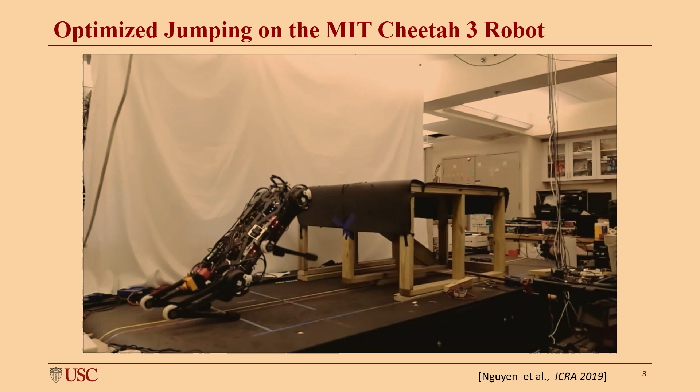To start my talk, please allow me to go back in time and share a highlight of my work here at MIT. When I was a postdoc with Sang-Bae Kim, I had a chance to work with this mighty MIT Cheetah 3 robot. Even with a lot of development and commercialization for legged robots since then, I think this is still the most powerful quadruped robot that ever existed. However, when I joined the lab, the robot was able to walk quite well, but not able to jump yet. So the task that Sang-Bae gave me was, okay, you need to let it jump. It's quite a pity if we cannot let this powerful robot jump. And here we go. This is actually the video that's captured from Sang-Bae's phone using slow motion. Okay, so that's a good memory. Earlier this day, I had a chance to visit and meet with the MIT Cheetah robot again.

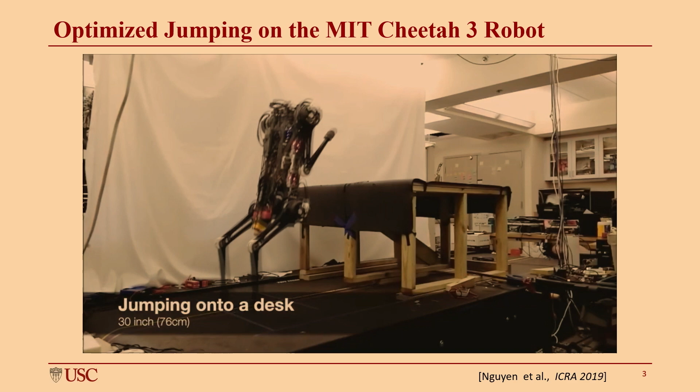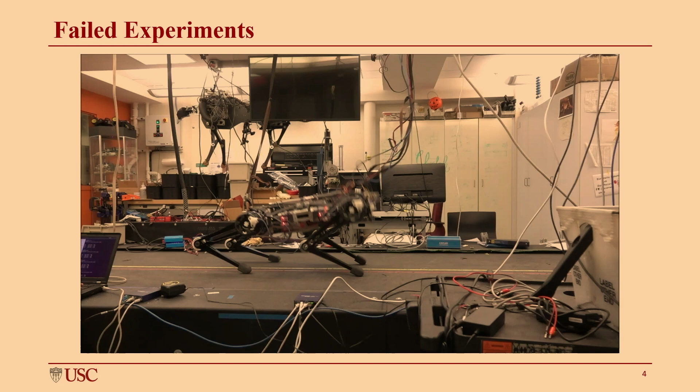There's one more video related to this that I really would like to show here to the audience. This is a compilation of some failed experiments that I got along the way before getting the successful experiment that I showed you earlier. I have many more videos, but I just want to show a couple of them. The message that I want to show here is that I know some of you in the audience could be PhD students or postdocs. So if you happen to get stuck with your experiment, don't worry, this happens all the time. That's how we do reinforcement learning for research, right? We keep trying. If it fails, let's learn and improve over time.

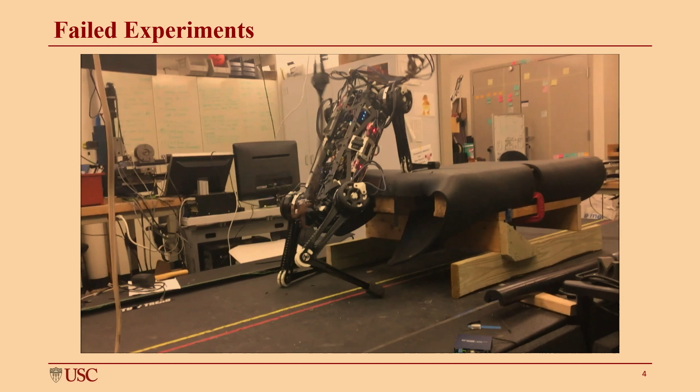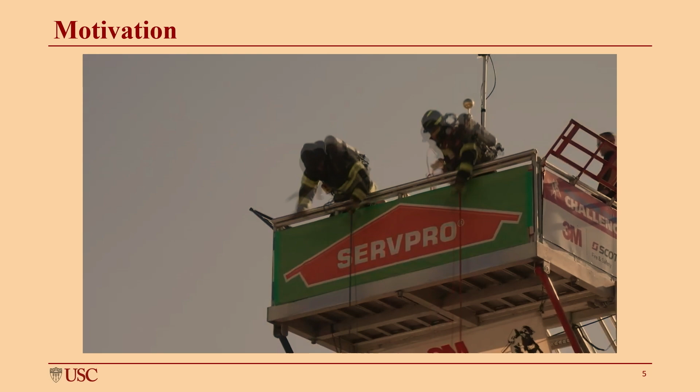So come back to my talk, talking about the motivation for my research. Let me first play this video. I feel pretty lucky to find this video because as you see later on, this represents very well different projects that I will be presenting today. In this case, as you see in emergency response, our first responders just barely walk, right? They just run, use their hands, use their entire body to climb faster and at the same time carry very heavy loads or equipment. So they need to deal with lots of heavy lifting tasks, and they need to do it very quickly, as fast as they can, because of the urgency.

So for this, I want to highlight here this about dynamic loco-manipulation whole body manipulation, because they do a lot of loco-manipulation tasks, but you need to leverage the whole body to perform this task very effectively. And the second part here is that they need to adapt to different load carrying problems, and they also need to adapt their performance for challenging terrain. These are actually three main capabilities of legged robots that our lab has been trying to achieve in the last several years.

I hope the video I showed earlier can provide some good reasons why legged robots can be helpful. In my opinion, legged robots can soon help replace humans in many meaningful applications. But I believe the key features we need to achieve this are agility and adaptation. Without agility and adaptation, we would not be able to have legged robots in practical applications.

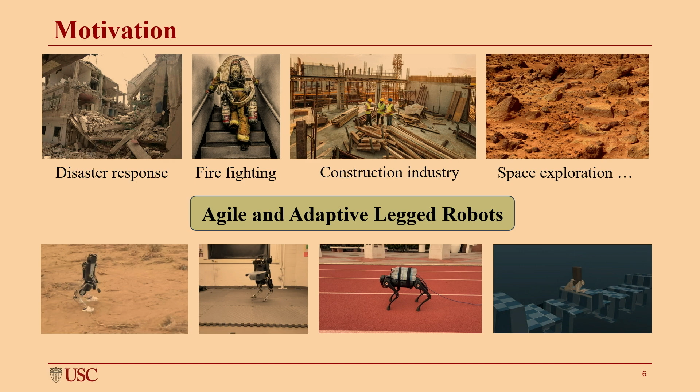To tackle this challenge, we have been working on different problems and solutions to improve agility and adaptability for legged robots. Today I'd like to highlight three main research topics in our lab that I will present, and show some quick videos to give you a big picture of our work.

Firstly, I will talk about our work on MPC for dynamic locomotion and loco-manipulation for both quadruped robots and humanoid robots.

Secondly, I will present our work on adaptive control for legged robots that allows legged robots to run while carrying unknown heavy loads or interacting with unknown objects. This is a video for one of our projects on the second topic.

Lastly, one interesting question we are trying to address in our research is how to leverage reinforcement learning to realize long-term agility and adaptation.

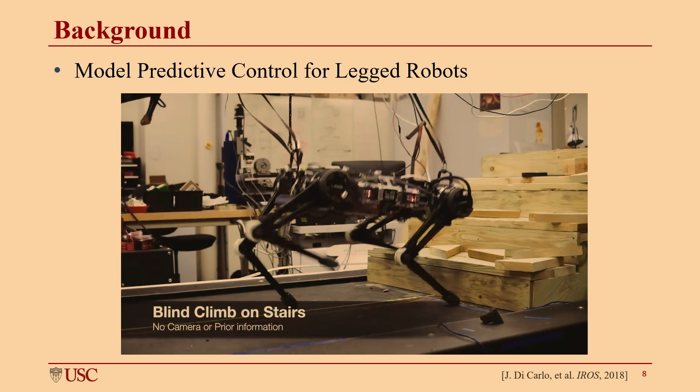Before explaining our research in more detail, let me give a quick overview of model predictive control for legged robots. This is basically the baseline approach for many other works I will be presenting today.

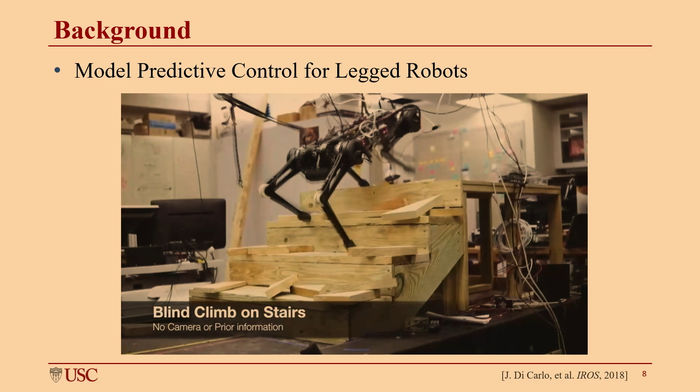As you see in this video, the MIT Cheetah 3 robot with an MPC controller can blindly climb up a stair with one single controller. It is very robust to this uneven terrain.

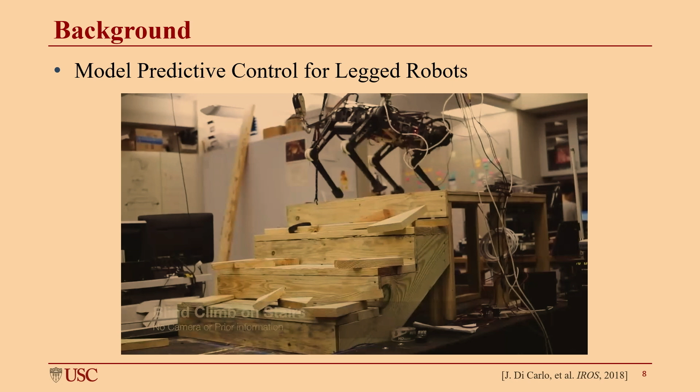In this video, it's totally blind - there's no camera, no prior information about the stair, but the controller can handle it pretty well. This is a very nice framework - it's very robust to uneven terrain. You can simply use one single MPC controller to achieve a wide variety of different locomotion gaits and velocity commands.

However, it also has several limitations. So what is the limitation? To better explain it, let me talk a little bit about the control diagram for MPC here.

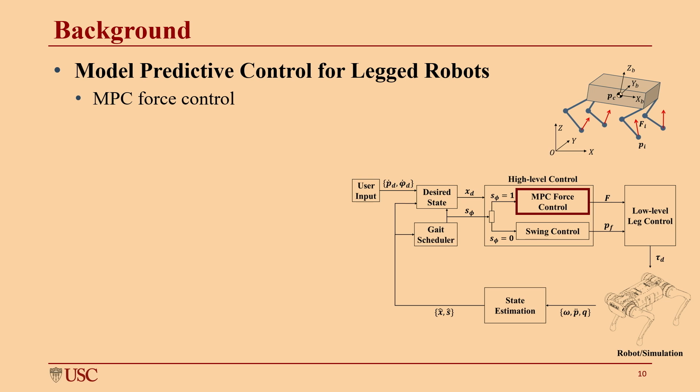There are two main components for MPC for legged robots. The first one is force control - when we have the legs on the ground, we do force control, regulating the force command to the ground. The second component in this control diagram is swing control.

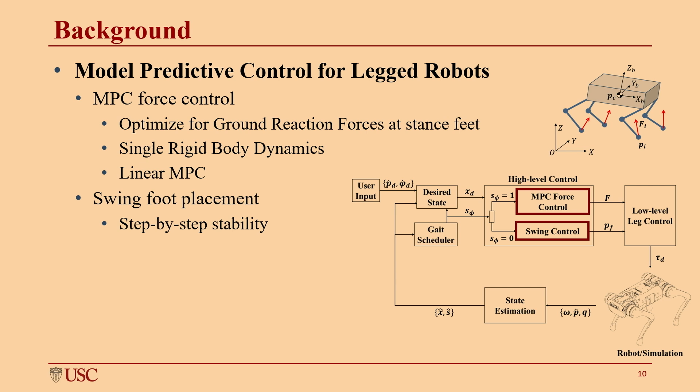For force control, we optimize ground reaction force at stance feet, but we use a single rigid body dynamics model because it allows you to have a linear MPC model so it can be solved effectively in real time. For swing foot placement, it's important because it helps you do step-by-step stability - basically when you take a step, it also helps balance the body.

So what's the problem here? Firstly, as you can see, MPC for quadruped robots is initially designed for quadruped locomotion only. In my talk today, I will discuss how we can expand MPC for loco-manipulation.

The second disadvantage is that because we need to use a simplified model to guarantee it can be solved in real time, it has some problems with model uncertainty. In the second topic, I will talk about how we can use adaptive control to address this problem.

As you saw in the control diagram I showed earlier, there are two components - stance and swing - but these are two controllers that are kind of decoupled from each other. Later on, I will present another framework using reinforcement learning so that we can better synchronize between these two components, or have a more unified framework to modify them at the same time.

Firstly, let me talk about our work on adapting MPC to realize dynamic loco-manipulation on legged robots. From this figure, I would like to show an overarching idea of our vision or application for loco-manipulation in this domain.

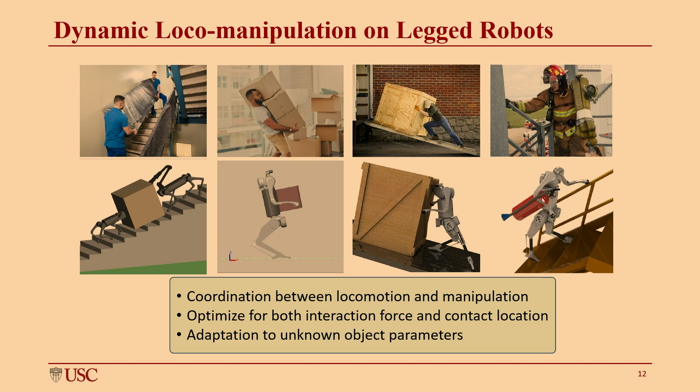In this application and these different figures, there are three main challenges that we focus on addressing. The first is how to coordinate smoothly between locomotion and manipulation so the robot can perform loco-manipulation effectively. The second is how to optimize not only the interaction force but also the contact location, since during interaction with objects, the contact location for the manipulation task is also very important. The last challenge is critical because in many applications we don't know the object's parameters in advance, since we interact with the object for the first time. So it's important to be able to adapt to a wide variety of unknown object parameters.

For the first project in the direction of loco-manipulation, I want to present this work. The motivation is that you may have seen work on in-hand manipulation, but if you have a very large object, it might not be possible to use a hand to manipulate it. So in this work, we use the entire robot body to manipulate this large and bulky object.

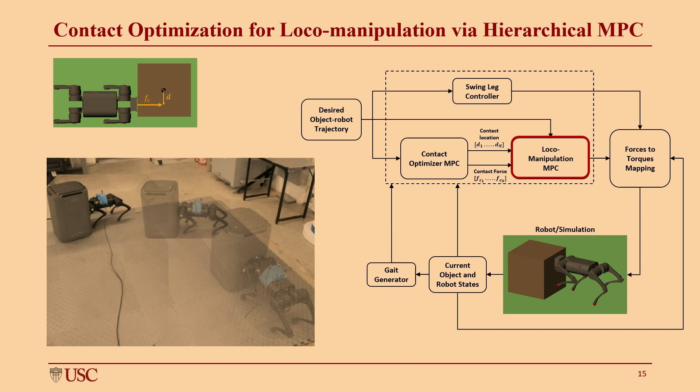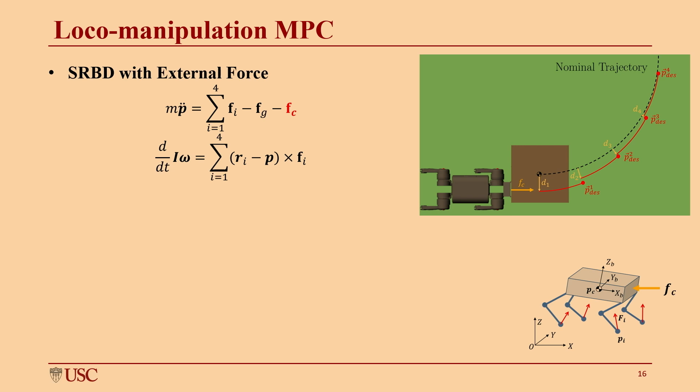The second layer of MPC, which we call the loco-manipulation MPC, regulates the desired contact force and contact location from the first layer. The principle here is that if the robot pushes the object with a contact force FC, there's also a reaction force applied to the robot. Using this knowledge, we design the MPC controller to regulate this contact force FC, and also use the distance or contact location to define the desired motion of the robot.

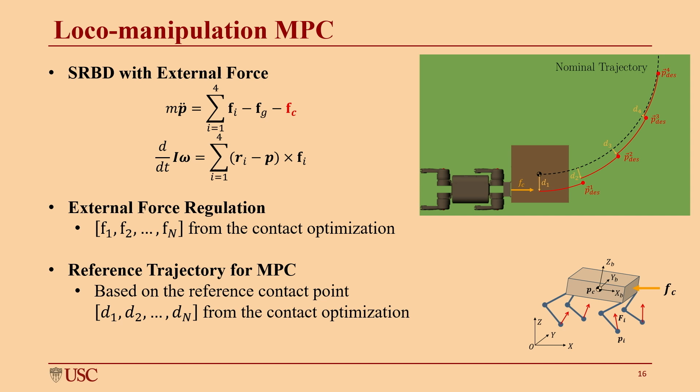As mentioned earlier, we don't only use one contact force and location variable, but leverage a sequence of them. Basically, we care about what we want to command in the future horizon, and it's important to put this into the MPC controller.

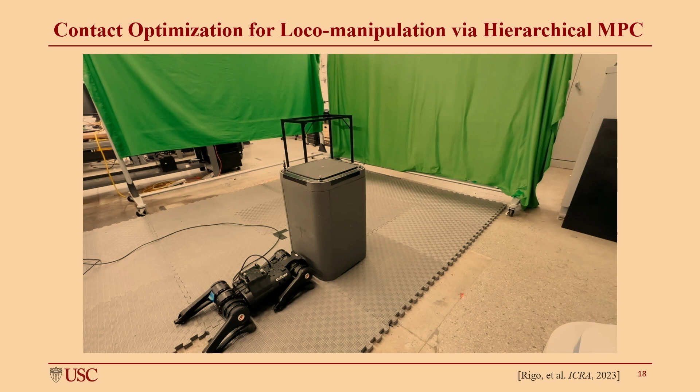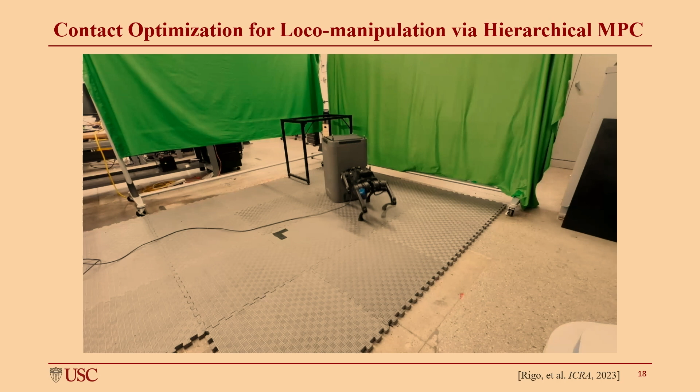Another interesting experiment I want to show here is one where the robot needs to push the box, but at the same time it also needs to avoid an obstacle. This requires accuracy in manipulating around the obstacle.

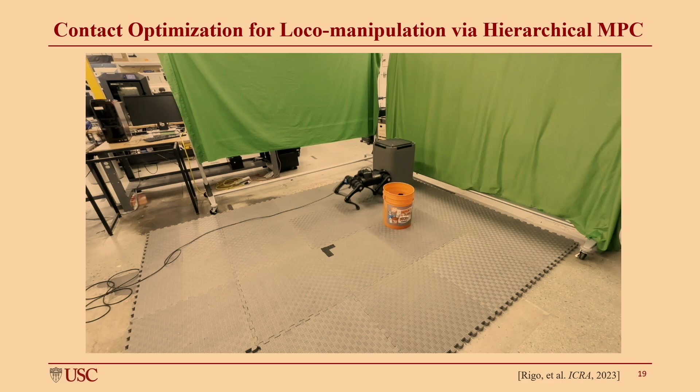So for the next part, let me continue with loco-manipulation, but now let me talk about loco-manipulation for the humanoid robot. For the first part, we expand the MPC framework for our bipedal robot. The concept is very straightforward and similar to what we had earlier for MPC for the quadruped robot. The only key difference is that we have a different model for humanoid: instead of having contact force only, we also have a moment that can be regulated at the contact point.

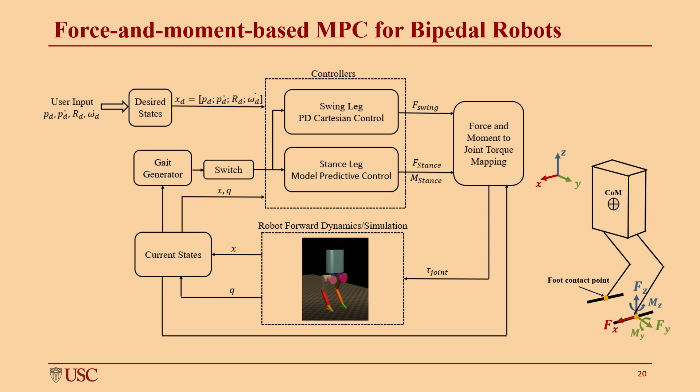With this simple modification, it worked quite effectively. Using this method, we were able to realize very robust and agile locomotion on our humanoid robot Hector.

We also tested this with different scenarios: we have locomotion, we have turning, we even have turning on uneven terrain. And we have our simulation open source here, so if you want to give it a try, please go to the link and try it.

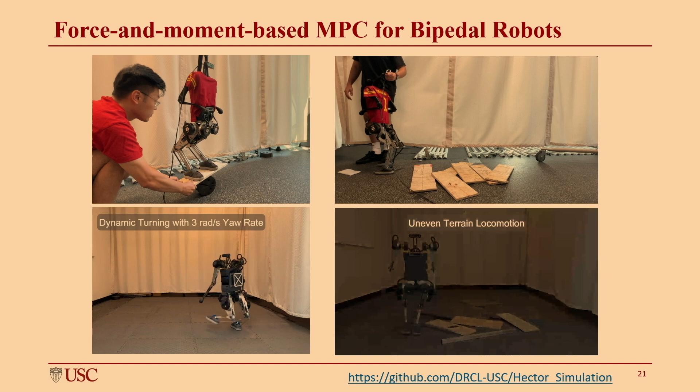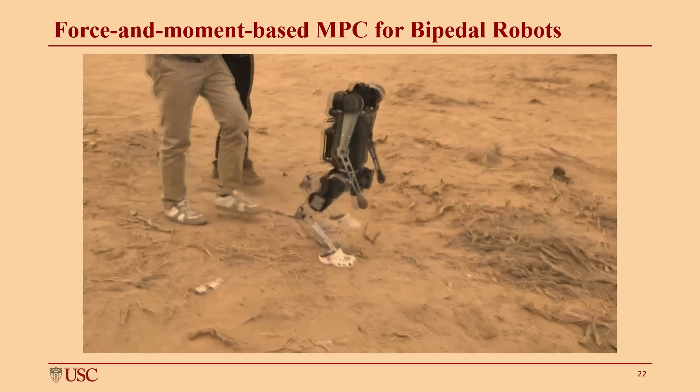And recently we also brought Hector to Mars. Okay, just kidding. So we brought Hector to a NASA event in the Mojave Desert in California, where the terrain is considered very close to Mars. We had a lot of fun.

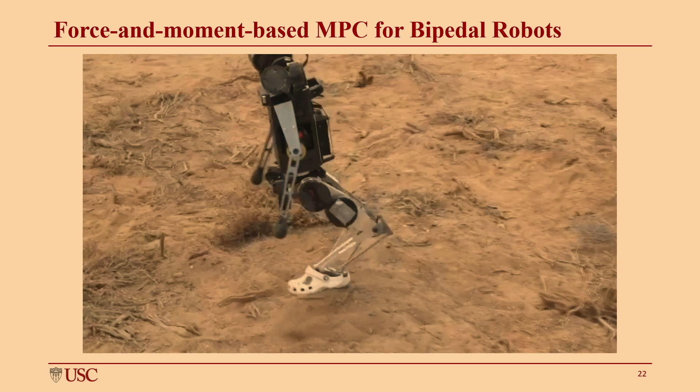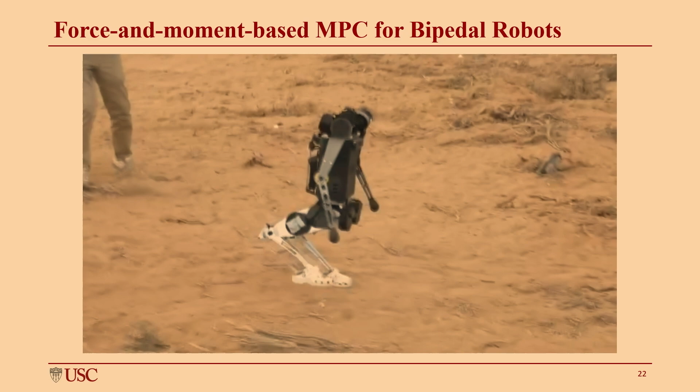But the weather that day was quite extreme. There were a lot of winds, and it was very hard to run the robot during this day. But we had a lot of fun. We ran the robot almost 6 hours continuously without

any problem, though the robot fails sometimes. Later on, you will see some failed experiments at the end. But because of the size of the robot, the failure is quite minor, and we just bring the robot back up, reset, and run it again.

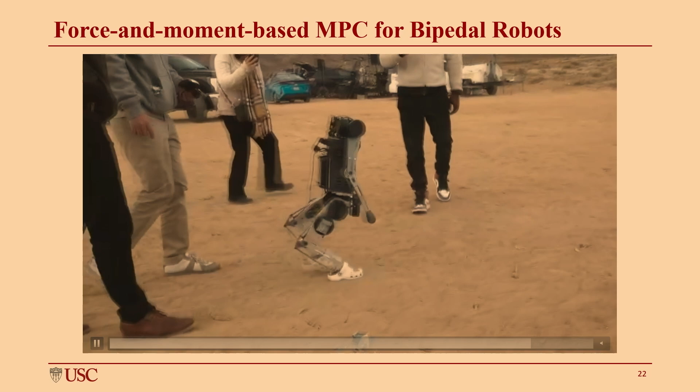I'm not sure if you can hear it, but the wind is very strong.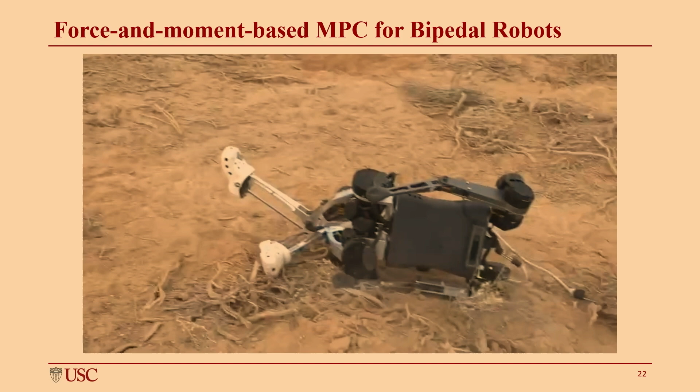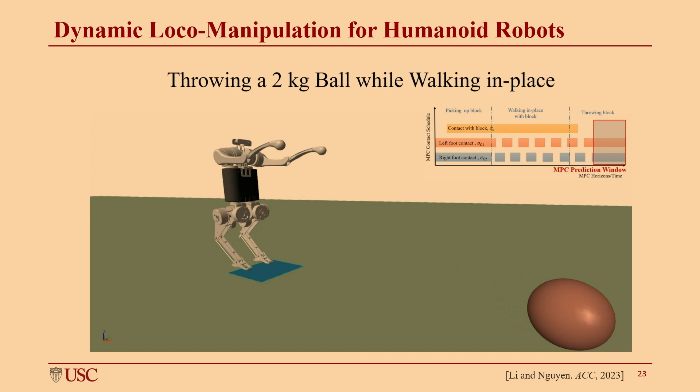As you see in this video, the robot picks up a 2-kilogram object and tries to throw it. As you can imagine, if you don't consider the object dynamics, and simply throw the object forward quickly, it will push back the robot and it will fail. So what's the principle that we have here?

The main principle has two parts. The first is we need to consider the object dynamics inside the MPC model. The second, also very important, is that we need to consider the contact sequence in the loco-manipulation task. So in this multi-contact sequence model predictive control, we have contact for the foot, but we also have a contact sequence of the arm with the object.

Talking about the model, there's one interesting finding here. Let me do a quick comparison. Let's say you're holding an object and you want to design a controller to manipulate it. There are three different options you may have in mind.

The first option is that you ignore the object, and consider that the robot stays the same. Obviously it will fail, because you don't consider the object in the dynamics.

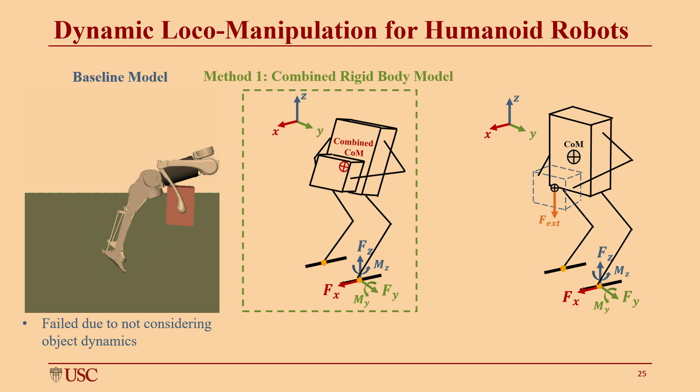The second method seems very straightforward: as long as you have an object, you just attach the object to the body and combine them. That seems like the most straightforward way to do it. But when we tried it, it failed.

Why did that happen? Because you don't keep the object all the time. Sometimes you have the object on the table, you want to pick it up, then put it at another location. This means you expect a change in the object mass or structure in the controller formulation.

But what happens when you combine them? At the time you combine, you significantly change the formulation of everything in the MPC, because you change the mass and the center of mass location — that's a significant change in the MPC formulation. Eventually, the optimization problem will not be able to give you a good solution.

The third option is basically the common ground between them: you represent the object as an external force. This means that when you have the object, you only have a single parameter that appears in the MPC formulation. So if you pick up the object and release it, there's only minor change in the MPC formulation, and it works very well.

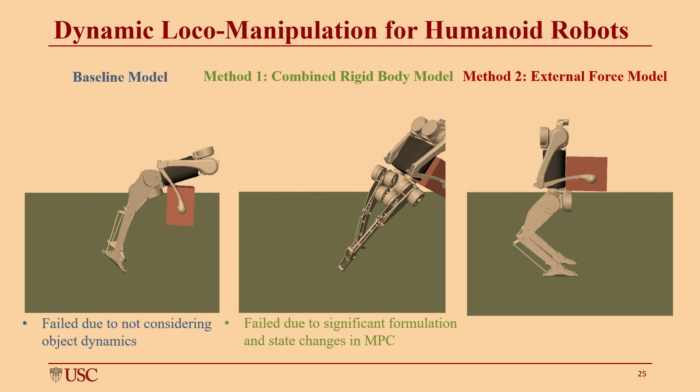So the conclusion is that we have this final choice to represent the object as an external force. Obviously this option will be less accurate and straightforward, but it works better when we combine everything together. This also highlights the meaning of hierarchical structure. When you have a hierarchical structure to perform different tasks, sometimes you need to sacrifice accuracy because when you put everything together, it needs to synchronize with each other well.

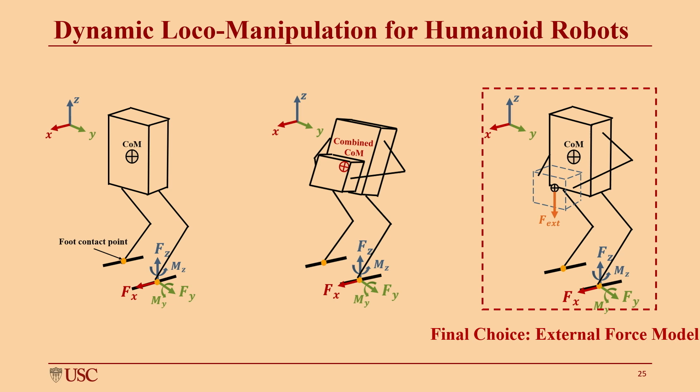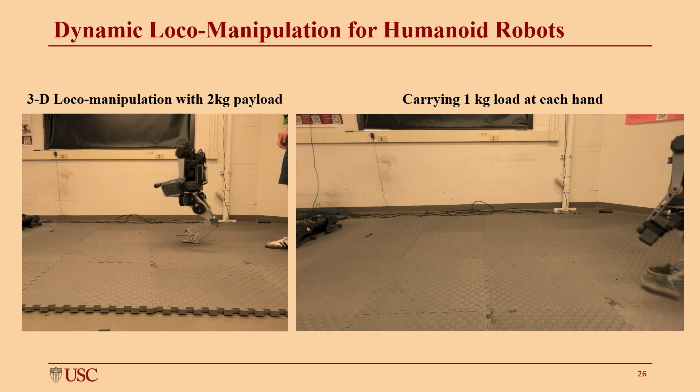Using our method, our robot can perform this dynamic loco-manipulation quite well. I think our students had a creative idea to use a battery instead of the load. We ran out of the load in the lab, so we put it there instead.

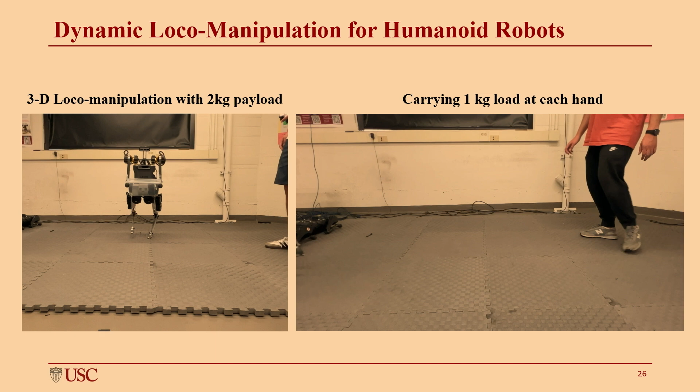Before I move on, any questions on this topic? Go ahead. So when you represent the payload as an external force, can you talk more specifically about the difference compared to it not representing some inertia term?

Yeah, that's a good question. As I mentioned, obviously the second option will be more accurate, because you mentioned moment of inertia, something like that. But I think one extension is that you can also have another term, like moment of inertia, to represent things if you try to do something more in 3D space. But if you just try to combine the objects, it changes — as you see in the MPC formulation, when you change the center of mass location, it changes every equation inside it.

So for the second part of my talk today, I will discuss another line of work on adaptive control for legged robots.

Until now, I have been talking about different projects involving loco-manipulation when we handle objects. But some of you may think, okay, the assumption that we should know about the object's mass, moment of inertia, friction, right? Because normally we don't have it — you have an object in front of you and you try to manipulate it. So what does that mean? It means that in practice, you want an adaptive controller framework so that you can handle this wide variety of different objects and assumptions.

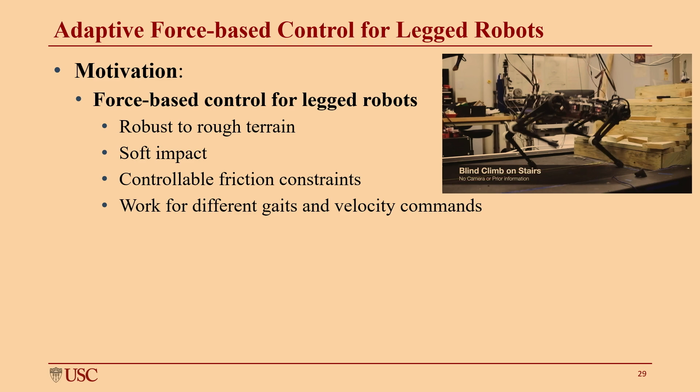So before presenting the adaptive control work that we have, let me talk about the motivation. As you see, we have force-based control, we have MPC for legged robotics, and it works very well. But the current adaptive control framework from the control theory side is normally for trajectory tracking. What does that mean? It means that for robotics, you need a different trajectory for different motions. In this framework, we want to leverage adaptive control, but for force control, so that we can have the advantages of force control that we discussed earlier.

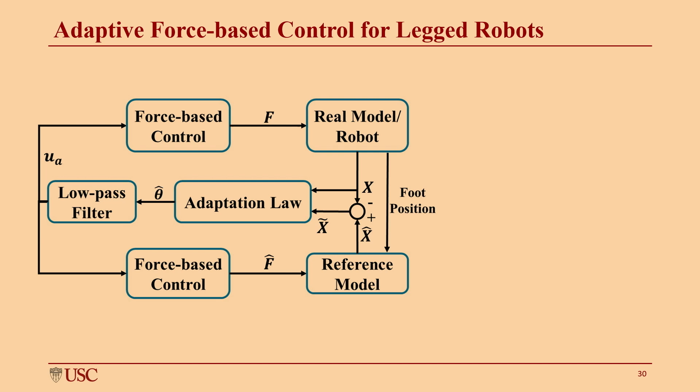For the interest of time, I won't go into too much detail, but let me explain the main principle of the method. Our adaptive control framework is based on the structure of model reference adaptive control, and here we compare the performance of our controller from the real robot and the reference model.

So the real robot here has, let's say, the robot carrying an unknown load — this load is unknown to the controller. And in the reference model, it's more like a simulation of the robot without carrying any load. The root of the adaptive controller is that it compares the difference between the state it gets from the real robot and the reference model, so that it can design an adaptation law to compensate for it.

But one important thing we need to modify and adjust so we can apply this force-based control for adaptive control is that we need to synchronize the foot position from the real robot to the reference model. Because in the reference model and the controller for the robot, we don't have swing control here, but as you saw earlier, we have swing control for both. However, if you also implement swing control in the reference model, there will be a significant difference between the two — but the goal here is that we want to adapt for the force-based control only.

So what does that mean? It means you need to modify the reference model using the foot position that you get from the real data. That's the main principle that allows us to do adaptive control using force-based control.

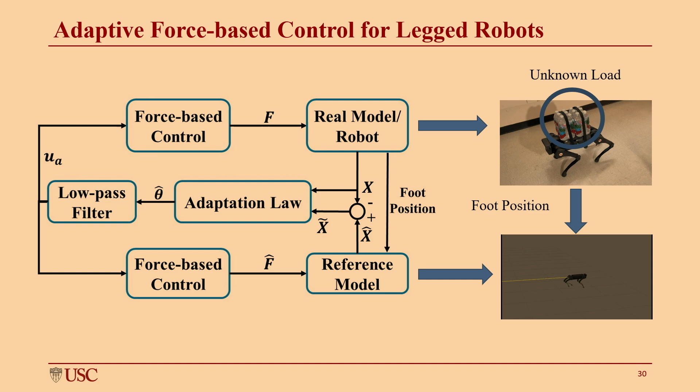Another challenge when we apply adaptive control, especially for MPC, is that MPC is very computationally expensive. If you need to run two different MPC controllers plus an adaptation law, that's a lot of complicated computation happening on board. So what does that mean? It means that in order to make it happen, you need to have this kind of adaptive frequency framework to make sure everything can run in real time.

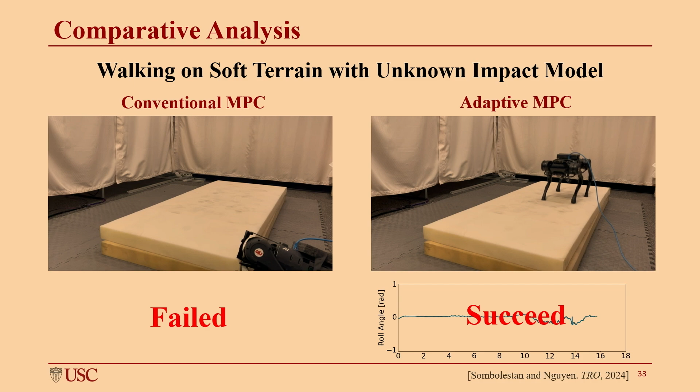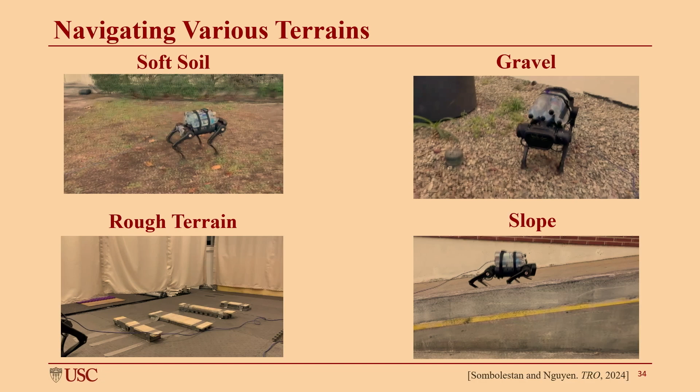We also validate our controller in a wide variety of different scenarios and terrains. This one is on a slope, carrying also 5 kilograms of load.

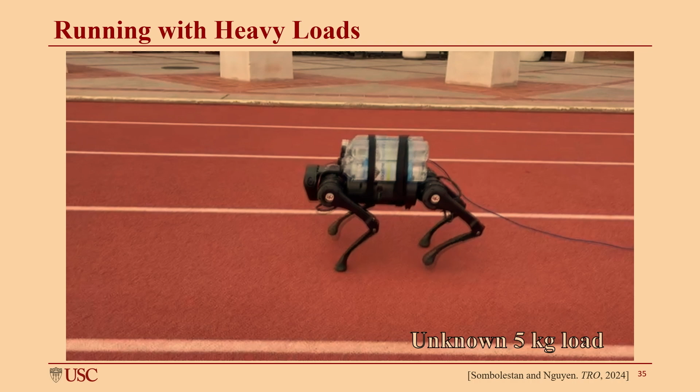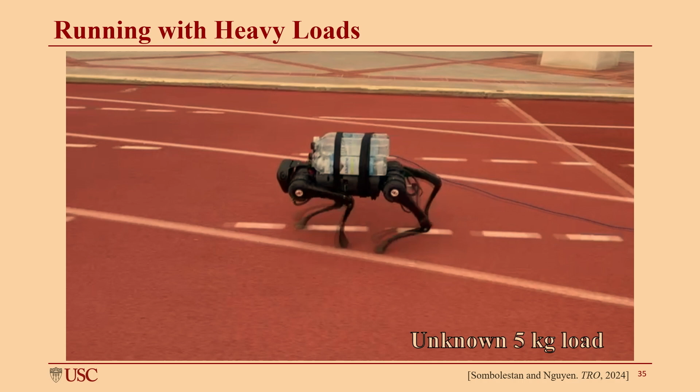One more video that I really like is that we are able to achieve fast running while carrying 5 kilograms of load. As you can see, when the robot speeds up, the water here is shaking a lot, but as you see from the video, the robot can keep its body stable very well.

To continue, I'll talk about how we extend our adaptive control framework for loco-manipulation and collaborative loco-manipulation. This comes back to the earlier example: if we have a large and bulky object, you would not be able to do in-hand manipulation, so one option is to use the body to push the object. Another application is if the object is very large, you normally need multiple humans or multiple robots to work together on this.

In this example, we assume we have a very large object. What assumptions don't we know? We don't know the mass, we don't know the moment of inertia, we don't even know the center of mass location of the object, but these parameters are normally very important for designing the controller or performing the task.

Layer 1 is used to design an adaptive controller for the entire system. You consider the object you want to manipulate, with different control inputs applied to it. In this first layer, you don't worry about where the robot is - you design a framework so you can manipulate this object using different control inputs applied to it.

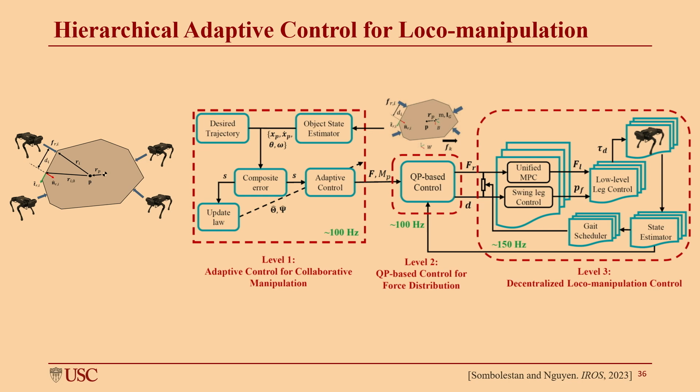Using this method, as you see, if you don't have loco-manipulation MPC, the robot gets stuck because we don't have the object in the dynamics. Here we have our adaptive control framework activated, and it can push the object with the desired velocity.

Here's another experiment I want to show. In this experiment, there are some interesting unknown factors. We have the slope, which is also unknown to the controller. We have the object, we have friction. These parameters are totally unknown to the controller. You see the robot just stepping normally, and the student puts it in front, and it almost immediately adapts to push this off.

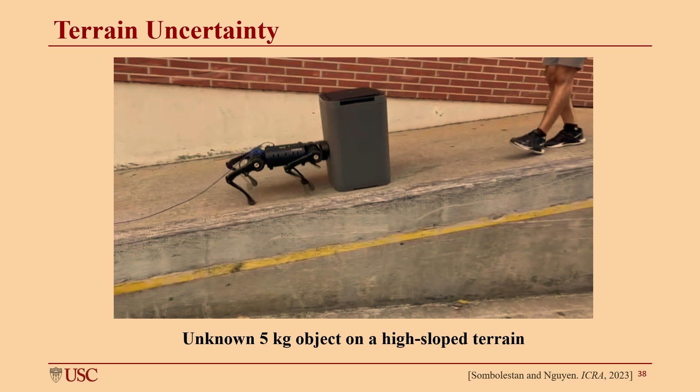Here's another work we did with collaborative loco-manipulation. We expanded it so now we have two different robots, one A1 and one AlienGo, working on the same problem. Because our method is very generalizable, we can treat different robots as different kinds of actuators to apply to this system.

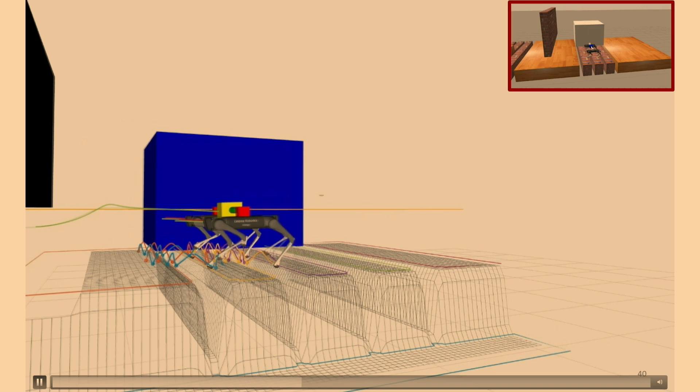As you see here, along the way, the robot will do footstep planning. There's a gap here, so you try to adjust a step. But if you have one single robot planning only, and you don't coordinate with each other, it's very easy to fail in this case. So that's a very challenging problem.

If you're carrying a sofa with your friend, for example, stepping upstairs is a very challenging problem. You need to be careful, you need to plan for it. Here, the robot also needs to adjust the height so that it lifts over the obstacle to avoid it.

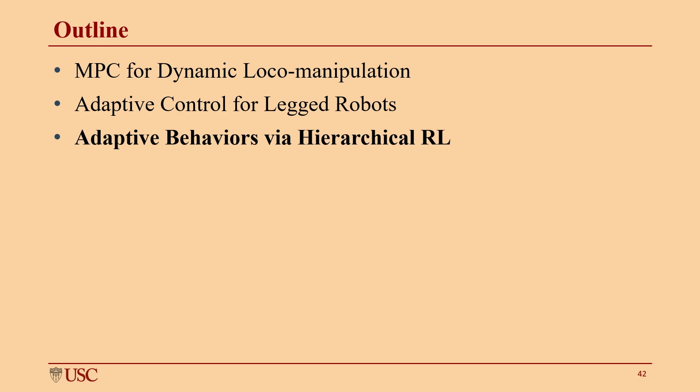Firstly, I would like to talk about our work on RL-augmented MPC so that we can better synchronize stance and swing control in the MPC framework. As I mentioned earlier, in our MPC framework there are two different controllers, one for stance and one for swing, but they're decoupled from each other. Here we want to leverage our reinforcement learning framework so that we can synchronize force control and swing control, to improve agility and adaptive behavior for legged robots.

The principle we have here, I'll explain it further, is a term called dynamic compensation to do adaptive control. Earlier when I talked about adaptive control, we have a load carrying problem. When we do that, it will reflect in some change in the dynamics equation, and this policy will try to learn this acceleration term. So this is the acceleration term, or force command. Later I will explain the reason behind this equation.

Using this framework, we achieve quite significant improvement in terms of agility and adaptability for legged robots. To be more specific, we can increase the turning speed up to 58%. We can do load carrying up to 80% of the robot weight while navigating compliant and unstructured terrain. In the last experiment, it's quite interesting that we can also handle blind stair climbing with swing foot reflection, because we change the swing control over time using reinforcement learning. So whenever it gets stuck, it automatically reflects and swings over the stair.

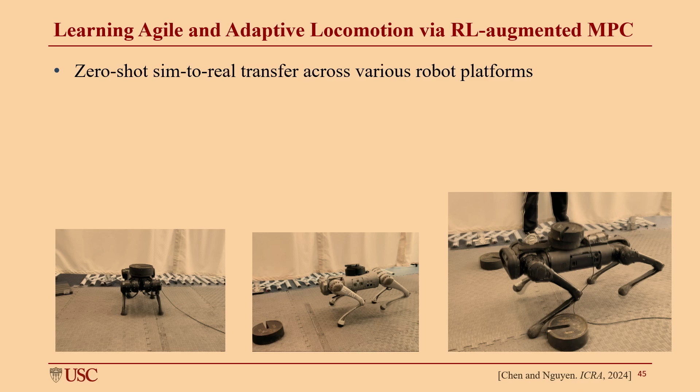Another interesting advantage of this approach is zero-shot sim-to-real transfer, not just to one robot, but across different robot platforms. What does that mean? It means we train everything in simulation using the A1 robot model, and this is the A1, this is the Go1, and this is the Alien Go robot, which is twice as big as the other two. So we train using the A1 model but can transfer to A1, Go1, and also Alien Go.

I believe the reason behind this is two key elements. First, we embedded MPC inside the reinforcement learning framework, so the robustness of MPC allows very good sim-to-real transfer. Second, the key thing is this acceleration term in our framework, which represents the physics of the problem. It says that any uncertainty from the physical world can be represented by an acceleration, and as long as you divide it by the mass of the robot, it becomes scalable to different robots. That's why our framework is generalizable for robots of different sizes.

For the interest of time, let me go quickly through the last part. Here we have our work on what we call Oracle-guided multi-mode policy, which allows learning multi-mode locomotion effectively from a very raw reference motion.

The key idea is that we first learn a latent mode representation for each control mode. For example, we have walking, hopping through a gap, jumping on a box, and we roughly define some reference motion. This reference is very rough and doesn't even satisfy kinematic constraints or dynamics. But it can be used to learn a low-dimensional latent representation for each mode, and this latent mode can be used as an Oracle guide in training, allowing us to learn a policy that achieves a wide variety of locomotion modes.

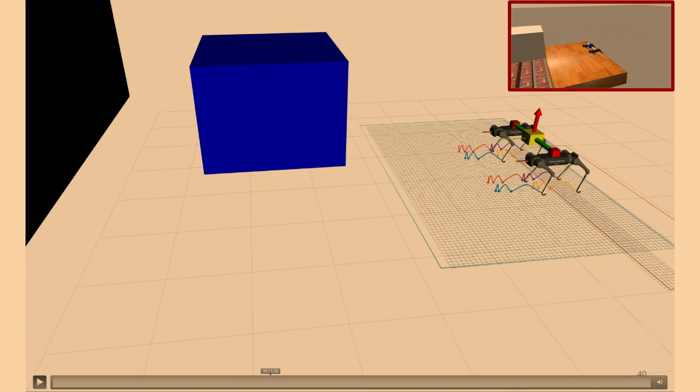One question I have is, going back to the unicycle one, what do you think it will require to transfer that into the real world? I think that's a very good question.

As you see, I would say it's not only the unicycle one, but for one of the main problems for Sim2Real it's also state estimation. In simulation, basically you know everything, but in experiments for humanoid and legged robots in general, you don't really have good estimation for your body. Joints may be okay, you have encoders, but the state estimation for your body is not really good. In training, you may have some information about your tool or the vehicle you're riding, but obviously in experiments you don't have any information about it. You need to leverage your own sensors to estimate or feel it.

I think that's an interesting thing related to some of your work as well. In manipulation, how can we leverage the sensor or the motor of our own robot arm, so that you can feel the environment and manipulate it well? Because we don't have any state of the object that can be measured directly. I think that's a challenge not only for this one, but for any humanoid or legged robot manipulation in general—you don't really have good state estimation.